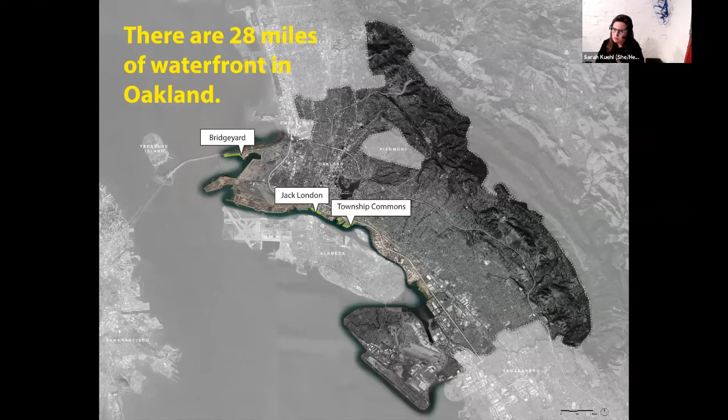When we started the office, I had been working at Peter Walker Partners on some planning for this site at the base of the Bay Bridge. When a new contract came up, I was fortunate to get my name associated with it, and we stayed on the team and got to continue, even though our office was only about 6 months old at the time. This is an extraordinary site in Oakland, especially in terms of its relationship to the bridge and to San Francisco. It was quite a journey where we learned a lot of what we needed to know to do Township Commons, about all the agencies, regulation, and how to bring something to fruition.

And ultimately, we're very pleased that we achieved a consensus among 8 heavy-hitting public agencies to have a park in this location, to reach big and make it bigger, to take the Bridgeyard building, the Ierbys building, back into the public realm, and to link it with trails back into neighborhoods where people are. So that was kind of a heavy lift at the beginning, but something that at a planning level has been very successful.

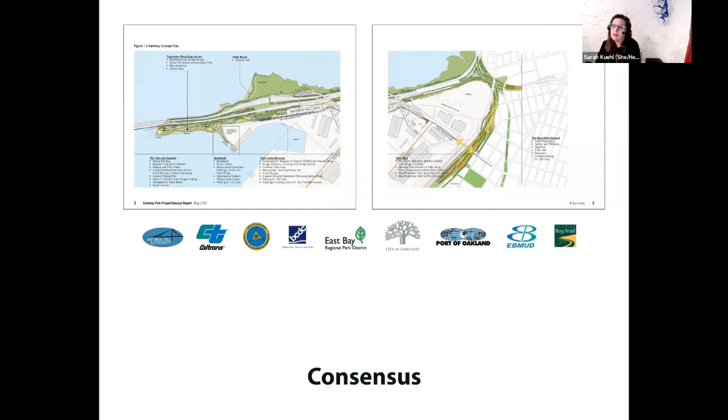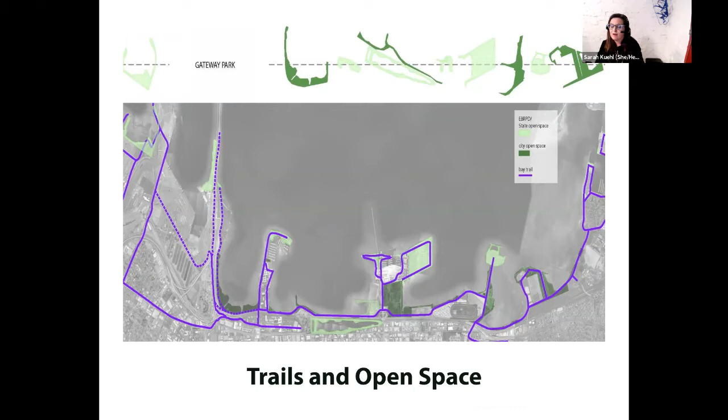It got us thinking a lot about the relationship between trails and open space, and how trails and open space need to work together, and that the best places actually do this very fluidly, where you could move from one space to another, use as many as you want, and move at different speeds through the landscape, whether walking or biking, or as we are now seeing, a lot of roller skating.

One of the things we thought about a lot on this, which has carried through in our work, is what is the three-dimensional experience? One of my pet peeves is that I think a lot of planning is flat and two-dimensional, and the three-dimensional experience of this place was pretty extraordinary. Little changes in height changed what part of the landscape you connected with, or you felt like you could see, or how big the space you were in.

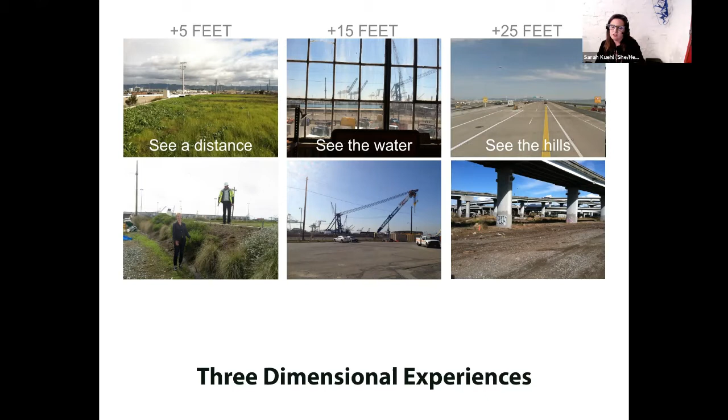And because it's such a narrow space, these little shifts became the way to construct a kind of procession of being in the space. It also shared some things with the Township Commons project, in that the old Ierbys building...

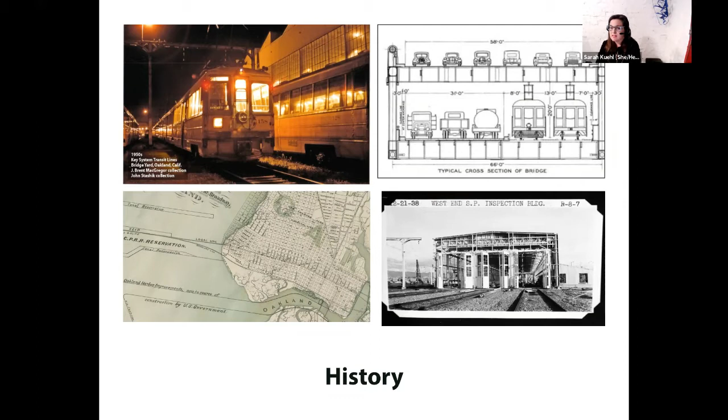...is a significant building that's actually on the historic register, where the key system used to stop and have trains repaired before they went over the Bay Bridge. So it had a lot of things about it that were important to think about, and to think about not just the past, but the future, and how all of those things might come together in something we would do today.

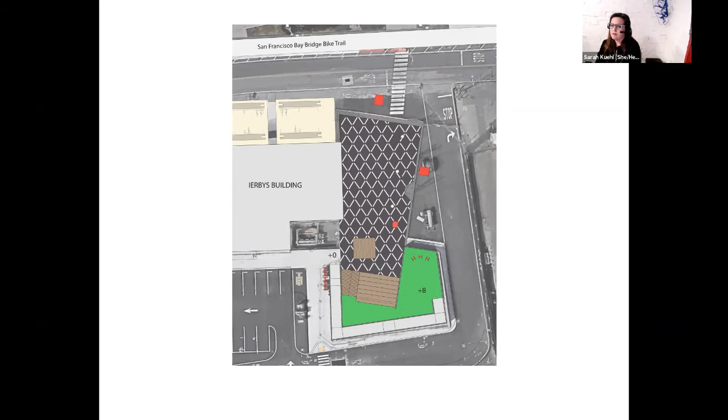We were very fortunate to get to do a kind of proof of concept project for the opening of the Bay Bridge. At the end of the Ierbys building, we did what was to be a temporary plaza at the time, an insertion that was just going to be there briefly, but I'm starting to realize it might be there a very long time, that made space in front of the historic facade of the building, and also gave people a viewing terrace.

And I used to come out here and wave my arms and say, this could be a great park. We're near the water. It's going to be wonderful. But not being able to see that made it very, very hard for people to imagine what it could be.

When we actually made our intervention, I used to joke and say, oh my God, it's our first landscape project and there's not any plants, people are going to wonder what we're up to here. But I feel like it's a great example of a landscape project which talked to this larger landscape of the bay and the waterfront and the water's edge.

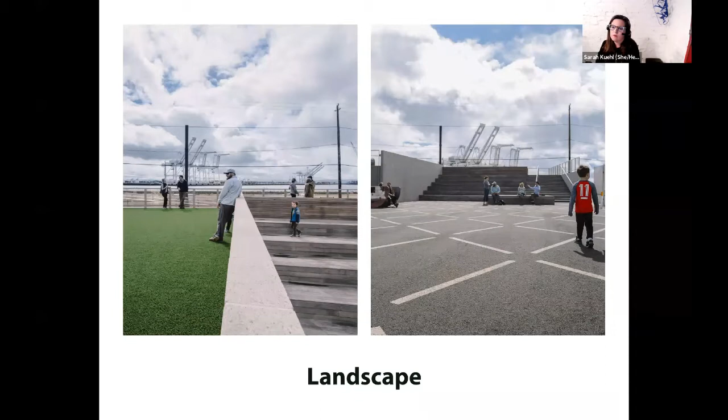So there was a stair, basically a bleacher that was made at one side that lifted you up and gave you views out to the cranes and out to the water, but also created a space with the flatness below that could be used for performance and other things.

And when we were done, there was a party for the opening of the Bay Bridge at the completion of construction. And all of the many people from the California Transportation Commission and MTC and others who had been nice to us about our ideas, but not necessarily on board, climbed up on the terrace and all suddenly went, oh, I see what you're talking about, because they could see the bridge.

This happens, the clouds are blowing it out here, but it's on axis with the tower. And you could see water on both sides of the toll plaza. And suddenly this felt like landscape to people as opposed to an industrial area. It was incredibly successful in terms of convincing people that this park really could happen here and could be a space that people would want to go to.

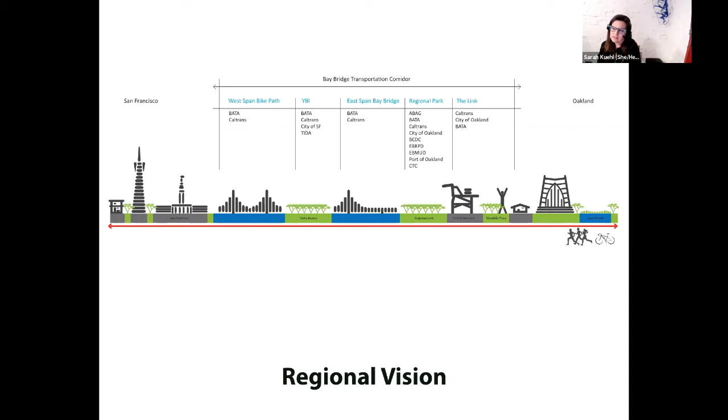The other piece of this that's interesting from an urban design perspective is there's a larger vision about the Bay Bridge and the transportation corridor connecting Oakland all the way to San Francisco, including trying to get a bike path on the west span. This idea of a highway-scale, bridge-scale space combining trails and parks all the way there is still being worked on, and this project is contributing to it, which we're advocating for as part of our work for the connection to Oakland directly.

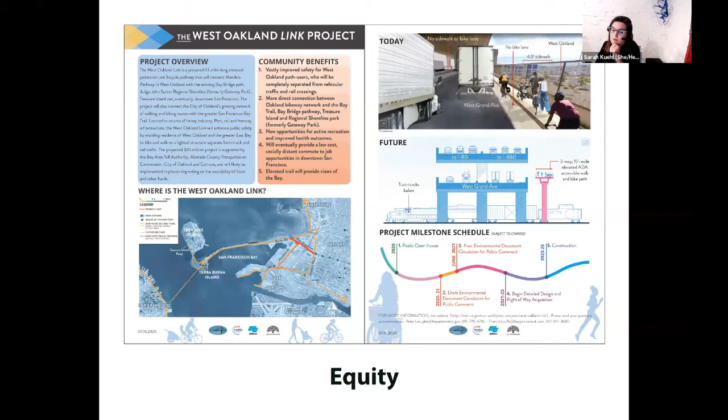Right now there's a bike path that only goes north, toward where IKEA is and up. We're looking for a more direct connection to Oakland to the south, advocating for the equity of that. It feels like only one of the off-ramps from the bike highway was built, and we want it to go both directions, connecting to these open spaces to reinforce what we've observed about open spaces and trails needing to work together and link people from neighborhoods to open spaces, particularly at the water's edge.

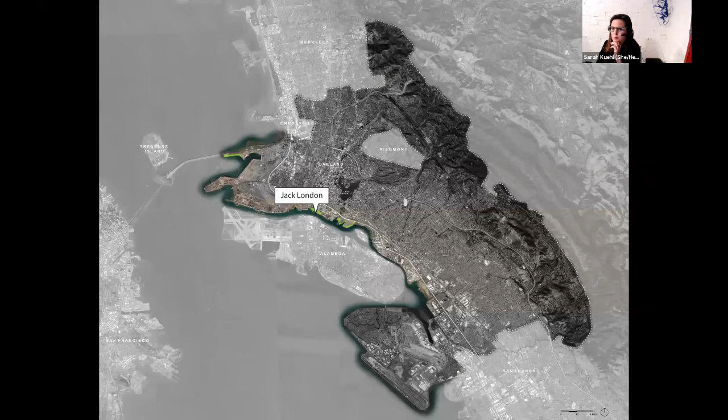The second project I'm going to talk about is at the other end of Grand. We got to work on Jack London, and our work there was very limited—we were brought in to address a bench problem. These are the existing conditions we were brought in to evaluate.

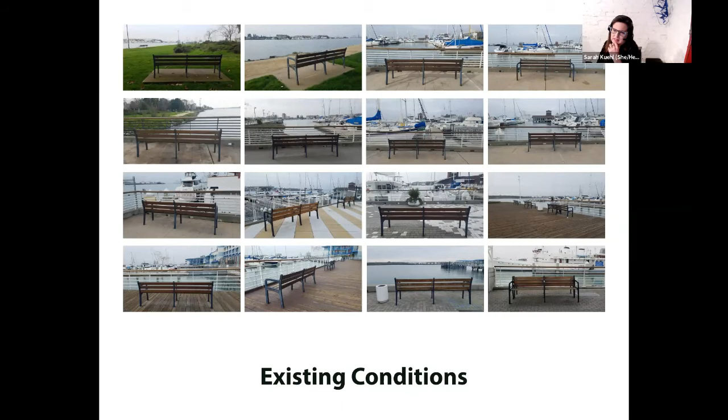It was kind of a stunning thing—it wasn't just that the benches were almost all located the same way, but they were positioned such that if you sat down, you looked through the railing. So we did an analysis of this and said, I think it could be better.

We looked at seating as something that actually has a lot of different social interaction possibilities—different ways to be alone together, or together with people you don't know, or to use things in different ways. And we said, we think we could do a proposal.

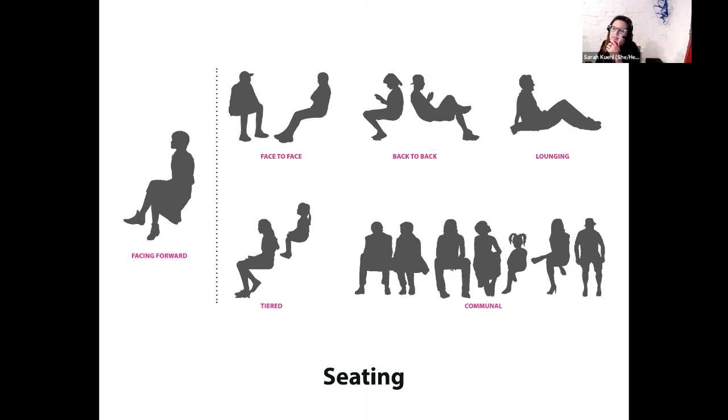We did really funny diagrams about how we'd keep the same number of butt spaces currently on the benches, but reconfigure them. We justified this to the port and BCDC and to the client, and people were on board with making a transformation.

This whole idea was partly because Jack London has been struggling to get up and make it. There have been a number of moments of intervention and things done to try to make it succeed. I think even the name was confusing—it was called Jack London Square. So as part of this, they dropped 'Square' and started calling it Jack London. I kept pitching that this is actually a good public park.

People can come here and do the things they would do at a park, and we should be trying to think about it as much that way as an entertainment retail destination. So we were looking at what was that little in-between scale that could extend what you might do there. And this was mostly with furniture.

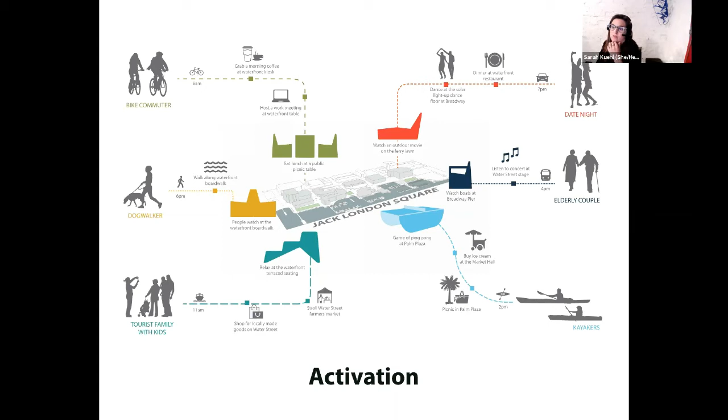A lot of this was done with just attention to clarity around things that you want to look at and things that you don't want to look at, things that you want to fade away and things that you want to use to order.

And we took all of the old concrete pots that were very white against the background and painted all of those with a stripe and tried to make it so you would see the plants.

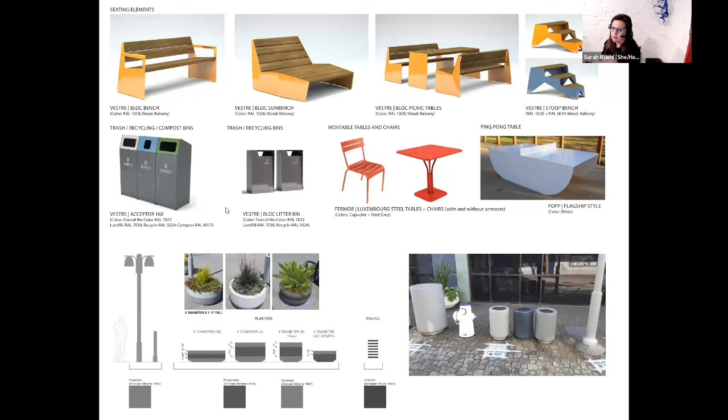So my point in sharing this project is our firm is actually unusual, I think, in some ways, in that we do high-end residential and we do small-scale projects, but we build a lot of our work. And so our thinking about urban design or large-scale things is informed a lot by the things we think about at a smaller scale, like color and palette and getting something lined up.

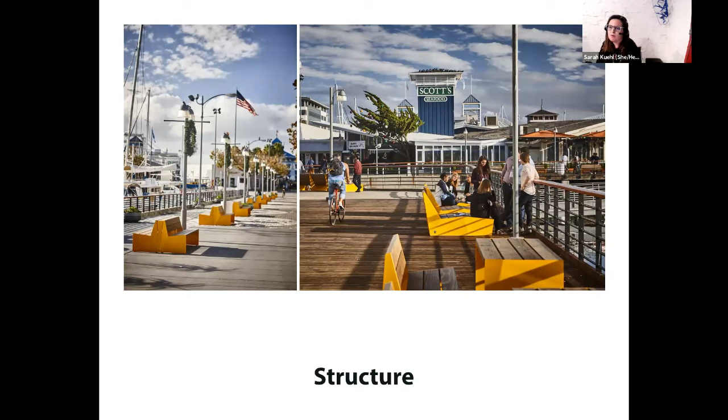So in the end, we ended up with a project that in some ways is very, very simple, but it was a lot about repetition, painting out light posts so you didn't think about them, locating things so that there were places to gather, and really simplifying what was here, trying to make sort of moments within the landscape that spoke to landscape, that somehow had a gesture to them, to a borrowed landscape or other things.

Should I keep going, Brian, or do you want to ask me questions? I'm happy, totally happy either way. I think we can keep on going.

Okay, great. So the real meat of tonight's discussion is about Township Commons, which we feel incredibly grateful to have gotten to work on, partly because we live in Oakland and feel like this is a contribution to the city that we are really proud of, partly because it's kind of always your dream to get to do a project like this big and this public, and you never know if you're going to get to, and partly because it just had a whole lot of happy accidents along the way in terms of opportunities that we were able to find and make real, but there were some really lucky things here too.

The project is located at the mouth of the Lake Merritt channel that connects to the Oakland estuary, and there's about 3,100 units of housing that are going into a 4-phase development. It is a place in the city which has been brownfield sites. It's been used a lot by artists. It's been kind of a no man's land in some ways for a long time. And this development is huge in terms of the transformation of the city at this location.

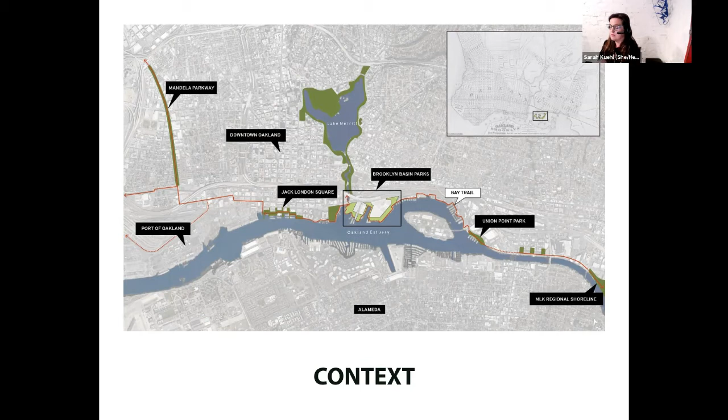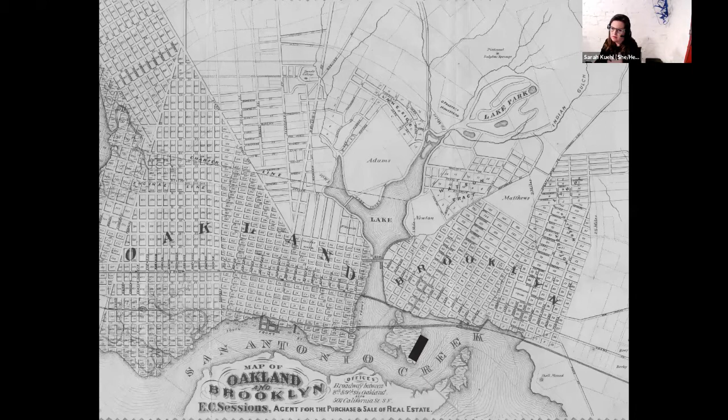This is Brooklyn, named for a boat that actually crashed here coming from Brooklyn, New York. But our site really was in the middle of water and marsh, if you look at the long history and ecology of the area.

It's a place in the city where getting to just sit and look at the water is a real amenity. We really think one of the first steps towards building ecology or stewardship in citizenry is getting to be near places that have ecology, and that you want to be close to things to begin to value them.

This history of the site evolved, and the 9th Avenue terminal was located here. And before container shipping really moved the Port of Oakland to where it is today, this part of the Oakland estuary was really the place to be for shipping and receiving.

Boats came in, trains came in, trucks came in. This is essentially a break bulk terminal where cotton and lumber and other things were unloaded from ships, dispersed from here, or reloaded on ships. So a whole lot of activity happening at those loading docks.

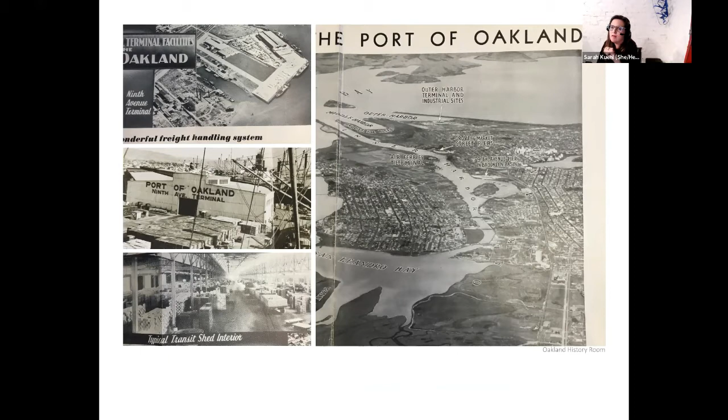The Port of Oakland in that time was a leader in its industry, and the transit shed, which is the 9th Avenue terminal, was full of stuff. There was incredible amounts of weight on it, and a huge amount of activity and labor that happened in this place.

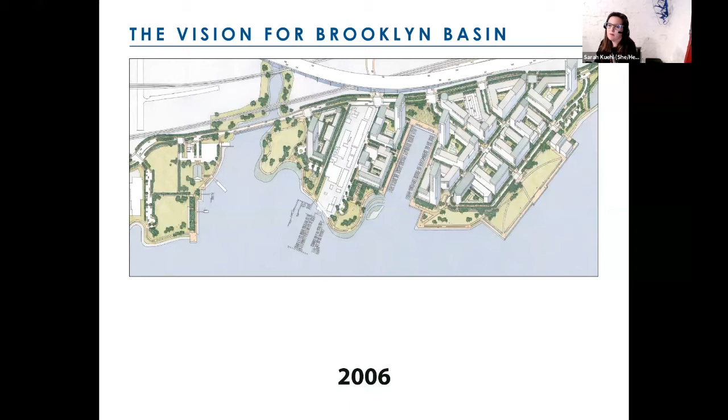When we started on the project, the developer, Signature Development Group, partnered with ZOHP, had been at it a long time. We started this in 2015, but there was actually a master plan that Roma Design Group had done, approved in 2006, which went through almost 10 years of lawsuits after that related to the 9th Avenue terminal. So when we got involved with the project, there had been a very long history that set street width, set building heights. A lot of decisions had been made before we got involved.

One of the reasons we had the opportunity to get involved with this was because the design review committee in Oakland kept saying the proposal doesn't look like Oakland, there's not enough here that's like Oakland. And there had been people protesting that there wasn't enough of the 9th Avenue terminal being preserved, that the story of the history wasn't being told.

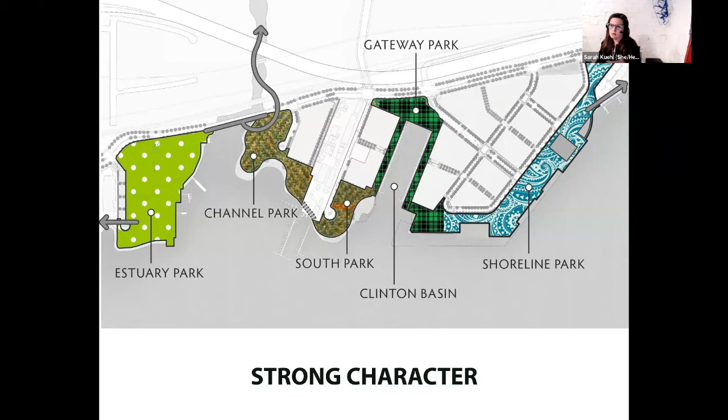So there's a real contrast over the collection of parks at Brooklyn Basin. When we started, this is kind of what the site looked like. It was already starting to have roads and had been cleared, but the 9th Avenue terminal building was intact. We were told to take a look at it and come back and start making some proposals about what this should be.

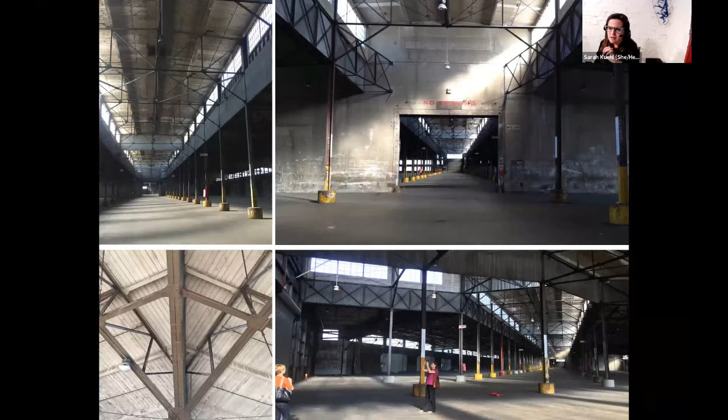I really like old things and old buildings, and it had that kind of magical ruin quality that a lot of places I like do. If you're kind of a romantic about old buildings, it has that. The trusses were made of this tiny little half-inch angle, knitted together. It had a lightness that was very beautiful.

We were particularly taken with the photo on the bottom right, where because of the way a railroad track is laid out, because of the speed at which a train can turn, the whole end of the building actually turned. There was something really beautiful about that moment in the trusses.

We were also really taken by the loading docks and the rhythm of the facade, which we knew at that point had to remain, along with some of the other artifacts we found on the site. We were allowed to say, keep this, keep this, keep this - we like that, we don't like that. And somewhere there's other things in a container, including a phone booth from 1974 that we hope to get used on site someday.

The other thing we thought a lot about, or I was really taken with on the site, was when you walked on the railroad curves, you kept feeling like you were approaching the water, but turning away from it. There was something pretty great about that as an experience of being at the water, curving along that way. That was also a memory of the trains at the site, and we really wanted to keep that in our design.

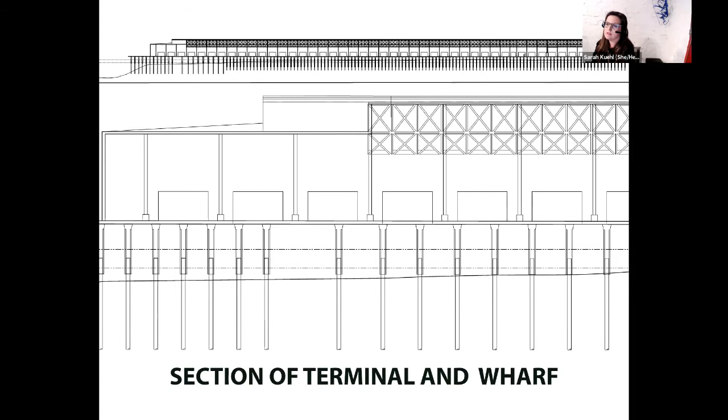Before this, we were thinking a lot about being on structure. Then when we came into this, there's a section showing that the whole 9th Avenue terminal is on piers and on a wharf. So our thinking about what to do at this place needed to be informed by a heavy lift of technical decisions in terms of what you're going to keep and how you're going to do that.

We worked with SGH, and there was also a report by Moffatt and Nichol and other people to determine what the health of the wharf really was. There were some places where it was in real trouble, and other places that were fine. There was an old rock wall under the wharf that, when run through modern seismic code, the rocks would jump around and break things.

So the whole structure that the park is on had to be retrofit to contemporary seismic codes, which was no small feat because the structure had already been compromised in some areas.

Oops, let's see. My screen may have frozen. There it is. There we go.

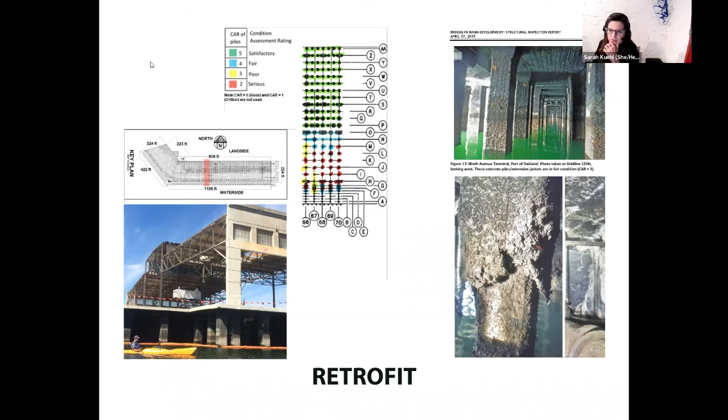Go back one. One thing you can't see now, but I think is important to look at, is the number 9 rebar, an incredible grid of rebar. What it took to retrofit this wharf in order for there to be a park here: there's an 8-inch section of concrete underneath the hill, underneath the deck, all over the surface of this wharf, that had to be saved. We also had to seismically retrofit all of the trusses.

So there's a whole lot of things that happen just to get to zero on this project. I think this is some of the luck on the project, that there was a willingness and a commitment to doing some of this, but a lot of money and resource went into things that you don't actually see in the final design.

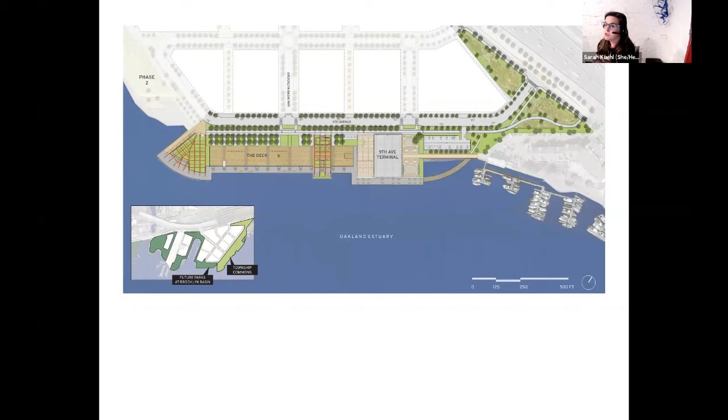And then there's a lot of area near the Embarcadero that has bioswales and kind of an approach landscape and trails into the site.

We really thought about how to do this as kind of an archaeology, wanting to keep the spirit of this building and this place, but also being wary of some parks we've seen where people have saved old things but not worked into them enough to give you an invitation to use them now. So there was a desire to keep old things but really take to heart this idea of adaptive reuse.

And to really work into them in ways with interventions that changed how you might imagine using them, trying to create contemporary conditions that would evoke places to play, gather, and for sports. The one big arching thing for those who have worked on the waterfront, this is within the state lands jurisdiction, and the rules say I can't have a basketball court or a playground or anything that wouldn't be considered a regionally drawing amenity. So part of working in and trying to get the spirit of this place was trying to get something that felt like something without some of the things you would normally do to activate a space.

So we saved 3 pieces of building. We ended up extending the piece that has the facade on it, making a large covered porch at one end. The middle piece we called the garden truss, with quite a bit of planting, a smaller scale, and vines that will eventually grow all over it. Then the hill truss, at the end of the building where that wonderful curve is, has a large grassy hill set inside, partly to give space for performance, but partly to tell you that this is really a park.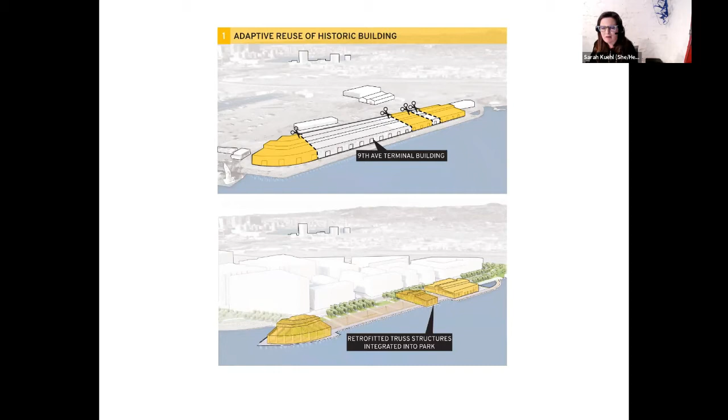We didn't want the public to feel confused or gypped, wondering 'am I supposed to go there?' So we wanted to do something that played with that idea of a park.

The other thing we got really interested in was the loading docks, and was there a way to keep them. So we made the ramps from 9th Avenue into the park at the location of each loading dock, rising you 2 feet up so the elevation of the deck in the middle gives a view over the water. But we kept that geometry, and we worked with an environmental design firm called Volume, who made amazing graphics with those loading dock numbers. I liked the idea that the labor history of this wasn't forgotten or thrown out as we moved into new times.

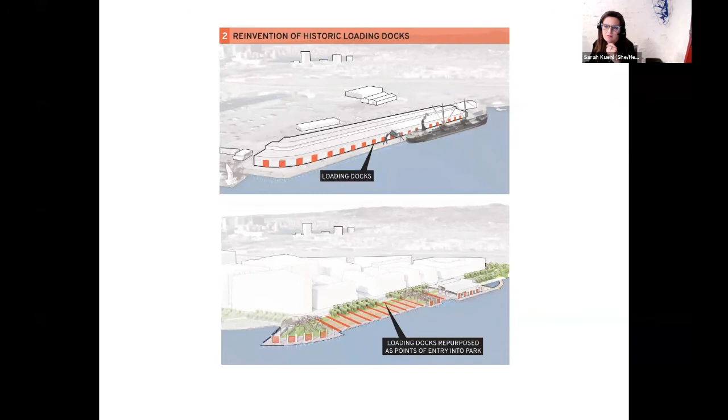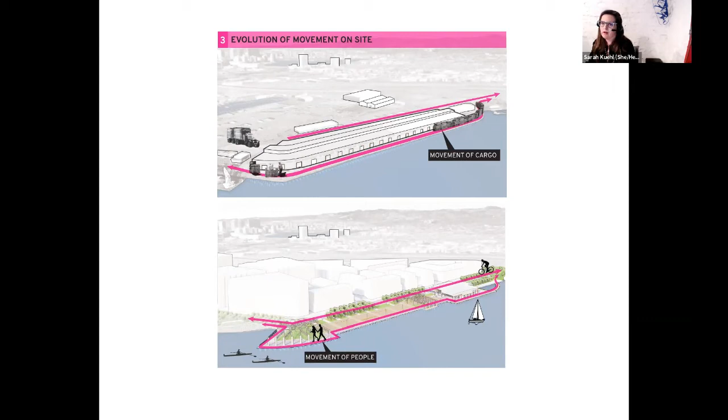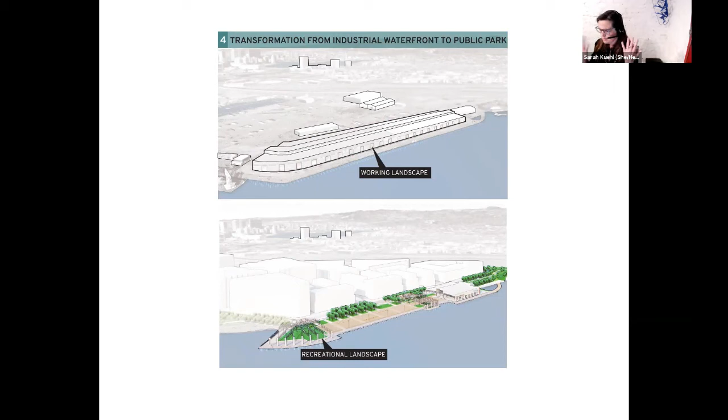The third thing was, as I talked about earlier, the movement of cargo or spaces - we thought about the movement of people and how we could build on that. So we took what was a working landscape and created a recreational landscape that has a lot of the fossily bones of this place, the spirit of it, but which is now a completely different place. A few pictures, and then I'll take questions.

This is the approach as restored. This was work done on this facade by Michael Willis and Associates Office, and the historic paint colors and so forth were put back. This is the approach up to the center of the building.

This is the other end of the park where the hill truss reaches out over the water with this kind of whale-back hill. The deck, the loading dock numbers that you see pulling through the ramps between the planters, the stripe that comes all the way across the deck, and then the numbers down on the water side.

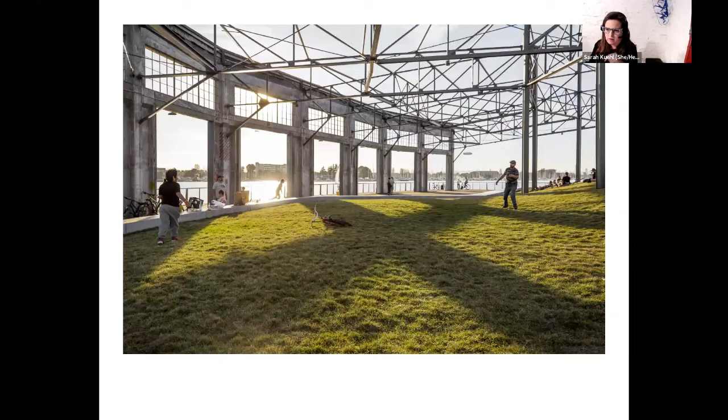Inside of that hill truss, you go up about 8 feet to the height of the hill, and it's a place where you see the water differently and get closer to the truss itself. It's strange in a good way, the shadows are really great out there, and people are finding weird ways to use it, as people do.

From the center of the deck, looking back at the hill truss, you get a sense of the scale and the openness. The deck board pattern is arranged so the light reflects really differently depending upon how the board is laid, so you get a breaking down of that surface, kind of like corduroy brushed different ways, which is really successful in making something of empty space.

The planting on the right side is something we really fought for. It's closer to the ground, so we were able to do that.

We weren't able to have soil really of any significance elsewhere in the park, and we really felt like the planting told you were supposed to be here and gave you some scale. We used the bright yellow furniture partly to remind people of Jack London, so they would know this was public and they were supposed to come, and partly because of its reference to industrial things.

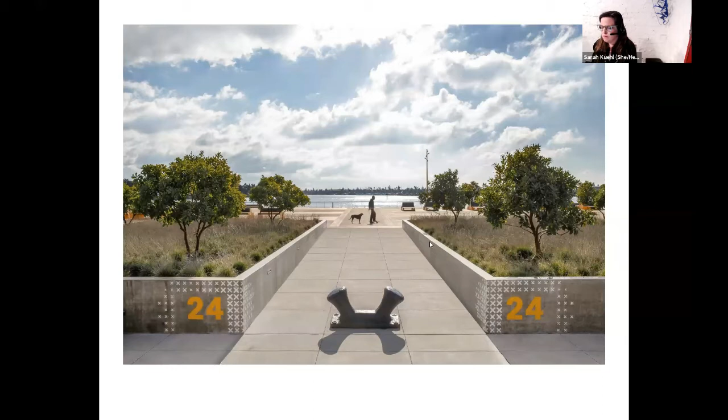This is one of the loading docks with the numbers mounted here, a salvaged boat tie-off that we're using as a bollard, and the approach up to the elevated deck. It's really great that the deck is up 2 feet, but the guardrail is low, so it doesn't feel very tall. You feel much closer to the water, and looking down, the water feels much more present.

Inside of those planters, we've seen a lot of birds and pollinators and other creatures making their way here. There's a young pheasant who thinks this is his home, looking back out at the watery landscape.

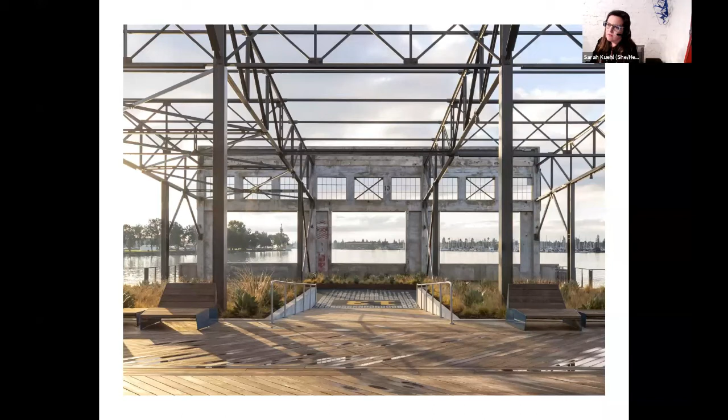In the garden truss, you can get a sense of how we retrofit the trusses. If you look closely, you can see where we've added some steel. We've also added a couple of X frames. We worked really hard to make sure architects in particular would find this respectable. We wanted it to look like we had succeeded in retrofitting it without ruining it, and we feel pretty pleased with how it turned out.

We also fought really hard to keep the marks on the building. There's some old marks and graffiti, and we clear coated them, but they're there. You can see how one of the loading dock numbers in the foreground relates to the old opening there.

This is the walk along the water on the other side of the deck, and the loading dock numbers are designed so that if you took a picture from up in an airplane, they would actually be the same digital pattern as water, evoking the shoreline on one side. You can see this very broad area along this side and a very simple guardrail in connection to the water.

The thing that maybe we're most proud of is when we went to the design review committee, they said, but how will the public know they're allowed to come here? And what will they do here? And will people really want to be here? It has been incredibly well received by all of Oakland.

Lots of different kinds of people come here to do lots of different kinds of things, but we've been particularly pleased to see how it works as recreational space, and recreational space for movement, which is something we thought about: bikes and roller skaters and skateboarders and others in the space. There's a lot of love for it across sort of 3 generational groups.

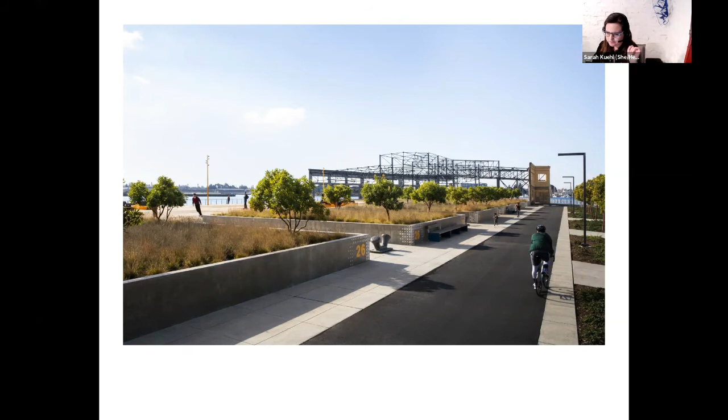So this is the bike path, which will connect to future parks. We only have about 1/3 of a mile of the Bay Trail in this project, but in the end, there's almost 2 miles of Bay Trail in all 4 of the parks. It comes along this side and connects to Jack London, as well as to parks to the south.

From inside the 9th Avenue terminal, when you look back out at the park, you can get a sense of how those 3 pieces of truss stack up, and the quality of the space, which is a lot about holding empty space with very little, but enough that it feels defined and you know where to go.

It's been really interesting to see how people have made this their own. That large ramp, which was obviously needed because we wanted to do universal design, has become one of the favorite places for kids age 2 to 5. It's been very interesting to see how this topography evoked a lot of things and a lot of ways to use it.

Right now, this is phase 1. There are 4 phases of parks, and we'll be working on the second phase. Right now we're in construction documents, which is the piece that goes from 5th Avenue around one side of this Clinton Basin and connects back to Township Commons. We're working on that one now.

We have no idea if we'll work on more after that, but we're really excited to do that one also, because it's on ground and we'll be able to really plant some big things, which is really exciting for us, and just to see this vision come all the way together.

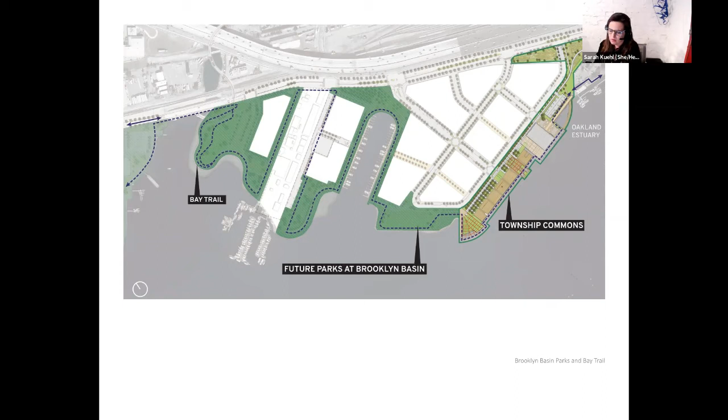My closing comment, since I felt I needed to say something about urban design given this forum, is that it's a really interesting time in Oakland because we have one of the last functioning industrial waterfronts in the East Bay area. That waterfront is super valuable for that reason, and we're always going to have a partially industrial waterfront, but we also have this emerging reconnection to the waterfront with more residential and people using it. So I think we have a very interesting consideration of how to bring those two things together, how to separate them appropriately, and also how to connect our parks back into our neighborhoods and make sure people have a way to get here.

I don't think we'll get a simple diagram of just lining the water's edge with joyful recreational parks. I think it's going to be messier and maybe more interesting than that. And I'm excited to see where it's all going. So thank you.

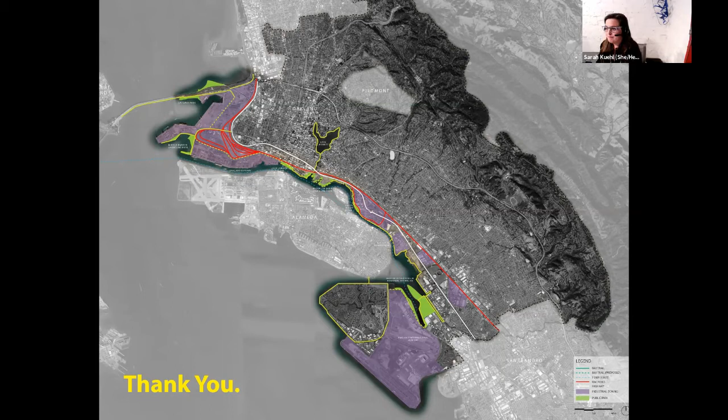Thank you, Sarah, very well done. Appreciate that, you covered a lot of stuff quickly. Yes, impressive.

I'm trying to sort through the questions, and this is a great way to end, because I was thinking that based on the questions, we'd go globally and then go back into the projects. So I think you touched upon it right here at the end.

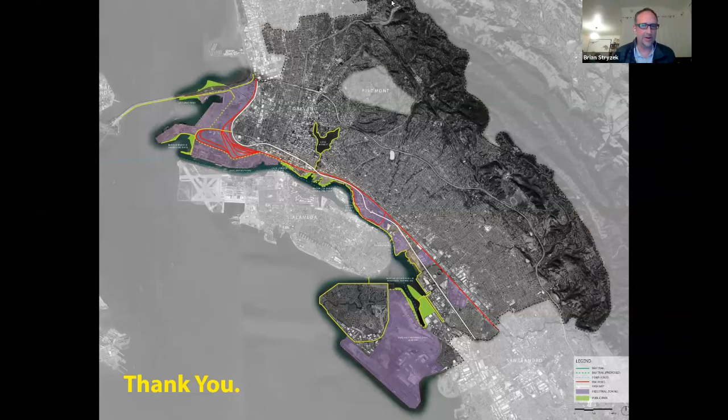There's a question from Louise Ingalls: there's 30 acres of built out parkland along the shoreline, is that right? At Brooklyn Basin, yes. And they're really asking about this idea of connecting back into the neighborhoods, and how is that done? When you're dealing with Brooklyn Basin, what was the conversation around that, particularly regarding Fruitvale and how that works? I know right now you have the railroads there, BART going through underground, Highway 880, all that stuff.

Yeah, I'm just going to pull up a different plan, and I can't do it while it's sharing, so give me a second. It's a great question and a really important one. There are so few places where you can cross the freeway, and so our emphasis was a lot about Fifth Avenue and how to make Fifth Avenue a place where you felt really good about crossing the street, crossing the freeway, because you can cross under there.

This became incredibly important, and actually the developer decided to pay for bicycle lane improvements all the way back to 8th, partly to make that happen. Also thinking about how you arrive here as a bike and pedestrian, there's a bus stop here, there's a future parking garage. This new piece coming, I think, is going to be a really big deal. I also think the bridge that was added here is a really big deal in terms of access, maybe from Oak Street and from the BART station. And so there is a weird site because it's cut off.

I think partly why we're so encouraged by the people coming is that—and we may have gotten very lucky with COVID—people are desperate for spaces. People have made this a destination for biking, but we're finding that people are finding it, and social media helps. If someone is on Instagram saying there's this great new park, people have a desire to go find it. So there's physical geographies, but there's this other geography, and they seem to be working on our behalf.

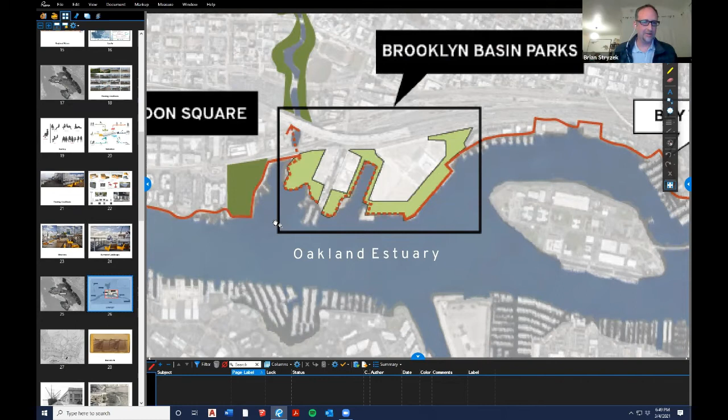In a similar way, thinking about it more horizontally, the connection of the Bay Trail—you started off by thinking about Gateway Park and how that started connecting to more of the region. Does Brooklyn Basin do the same? Where do we stand with the Bay Trail and its connections through all these projects, particularly in Brooklyn Basin and further south?

Yes, well, this map, if you look really close, has dashed lines and solid lines for the Bay Trail. So we're in the process of building our part of it. There's some complexity in the ownership, where there's a piece of land that is not owned by Brooklyn Basin, so right now the Bay Trail has to go back to Embarcadero.

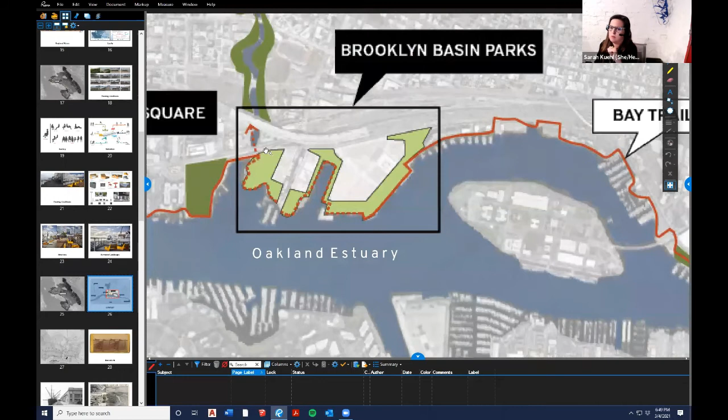But in general, the vision really is that the Bay Trail makes our waterfront democratic and accessible. It's the continuity and totality of it that makes it available for all of us. There's a commitment to having it be strong through all of Brooklyn Basin.

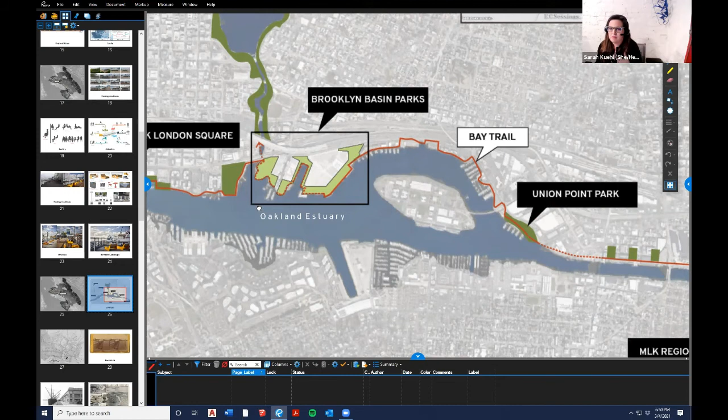I think it's going to be a big deal because our office is really close to Jack London. When we started, we walked from Union Point Park all the way up and looked at all of the waterfront to see what was working and what wasn't. It's tough, not a very great walking experience, but the parts that are going in now are better, and extending it and making it better, I think ultimately it all gets improved.

I really want to see Broadway improved, and the bike connections from downtown Oakland. There's a bike bridge proposed to cross from the Lake Merritt trails over the freeway and over the railroad or under the freeway, something like that. But it wiggles over here and lands right at the park. I think all that connectivity will eventually make it work better. The more is more, as you build more trail.

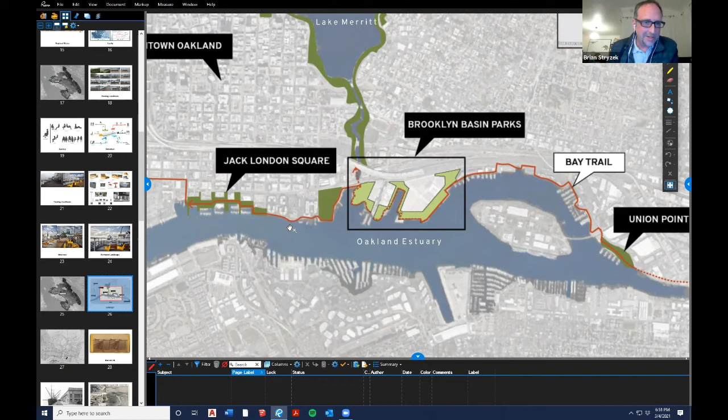Nate had a question about the Howard Terminal, which I think is good too, because there's not that many pieces of developable land right now along the waterfront, and that's a big hunk that there might be a ballpark on at some point. The EIR just got approved, so it's getting closer. Are you guys going to do that project too? No. I think there's a New York firm involved in that.

I have thoughts about that as an Oaklander and as a business owner in the neighborhood. I think it's really interesting. That project is right at this tension we were talking about, industrial uses and recreational uses. I'm interested to see how they take it on, and if that could be something really interesting. Kids are interested in heavy equipment. It could be great, but I think it has to be embraced.

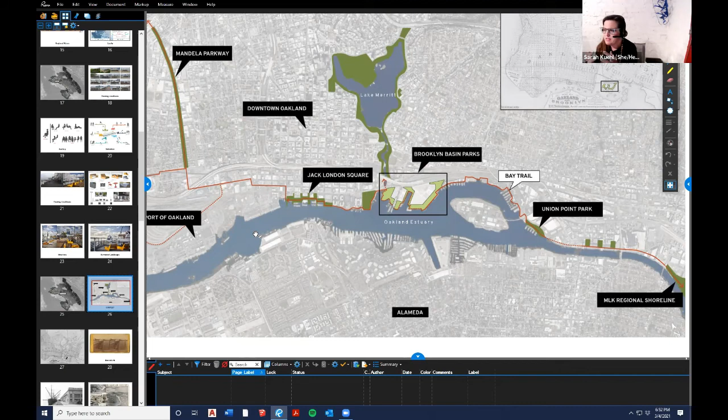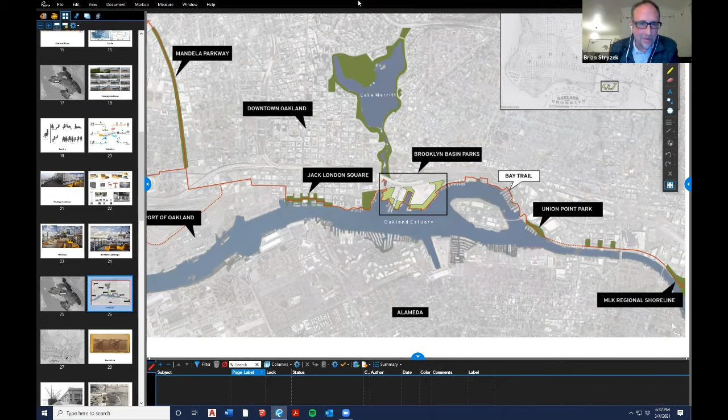Yeah, that's true. I don't know, is there any questions that people have that they want to speak verbally about? I have some other ones, but they're more microcosmic.

You threw this out there in the middle of your Jack London focus, but I was wondering if you'd elaborate. You mentioned that you build a lot of your designs, can you talk about that a little bit? Yes, and I should be super clear, I don't mean I build or Liz builds, because there are people who do that and that is really hard work. I mean that we don't just draw a vision, we really do construction documents and go through field and see projects all the way to the end, and sometimes even into activation phases. I think it changes how we think about planning.

We've been talking about the idea of full circle thinking. My example, which is a little unfair, is that every urban design plan has perfectly arranged alleys of trees on both sides. But if you've ever had to lay out a sidewalk with vaults and utilities and all the things you really have to deal with, you know how hard that actually is. Thinking about design from the perspective of a respect for what it takes to build things changes your respect for built things, which is maybe good. There's a great Jeanne Gang video recently about carbon and saving carbon by saving old buildings. I think there's something to be said for respecting the work that has gone into things.

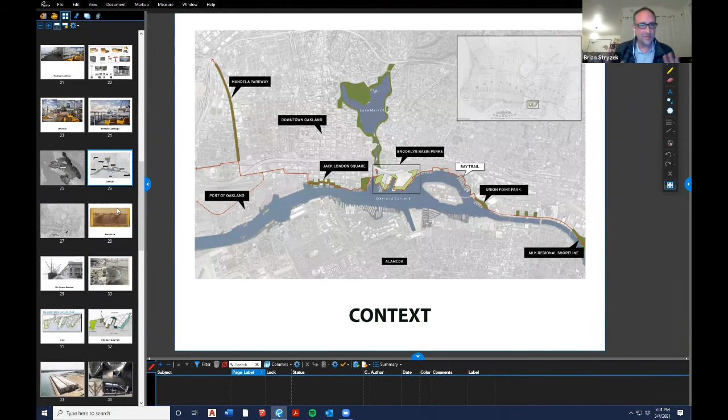So going deeper on the historic building, you have this vision of going out there and looking at the trusses and the beautiful light coming through it, and then finding pieces to preserve. So your role, or EK's role overall on designing it—sounds like Michael Willis is involved in some historic aspects. Were you the architect of the structure, or does it sound like there's more coming with the kayak shop and other things? This is a great question, and actually somebody pointed out to me that people might think we didn't do the architecting, but we did.

So the building was cut into 3 pieces. The 2 trusses, the one with the hill in it and the middle one, were 100% Einwiller Kuehl with the support of SGH as a structural engineer. The 9th Avenue terminal piece was kept more intact and has conditioned space—Michael Willis's office did the interior shell and facades of that, and worked on the retrofit.

We also had conversations, so this piece is less ours. And then other architects have been involved—I think Flynn Architecture and others have worked on the interiors and tenant improvements inside the building. So there's a couple of hands in it, but in fact, even though it's odd for a landscape architect, we did do the design and structural coordination and all the drawings for 2 of the 3 trusses.

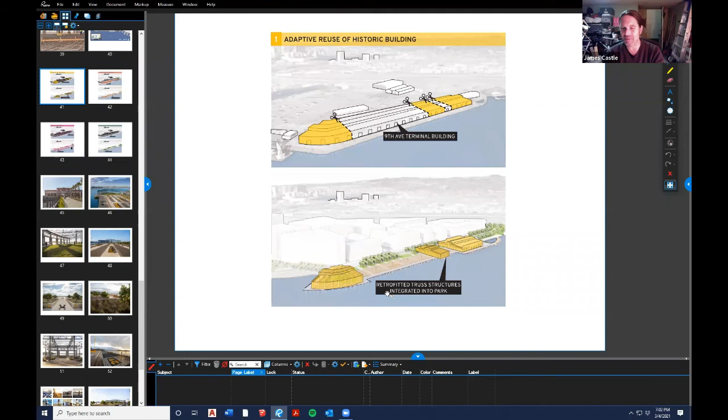What was that like? That had to be a pretty good learning curve, right? Yes, sort of. I think the bad-good thing maybe about my personality and Liz's personality is we like to do things we've never done before, probably more than we like other things. We're generalists, but we believe in solving problems—we know about structures and working on them. So it was fun in one way and hard in another. If anything, our big worry was we wanted our architect friends to think we did a good job, so we'd have some street credibility. So we were motivated.

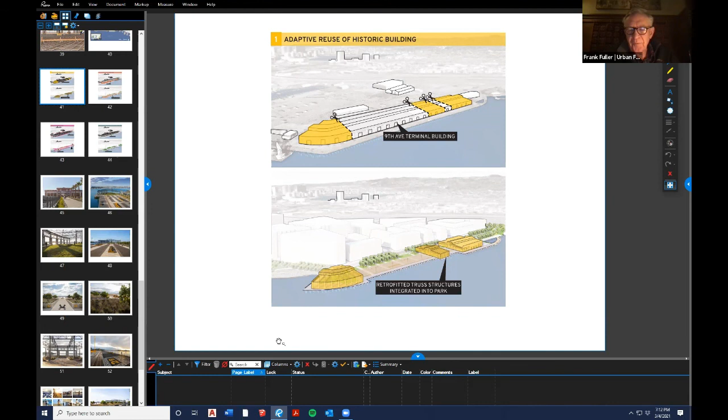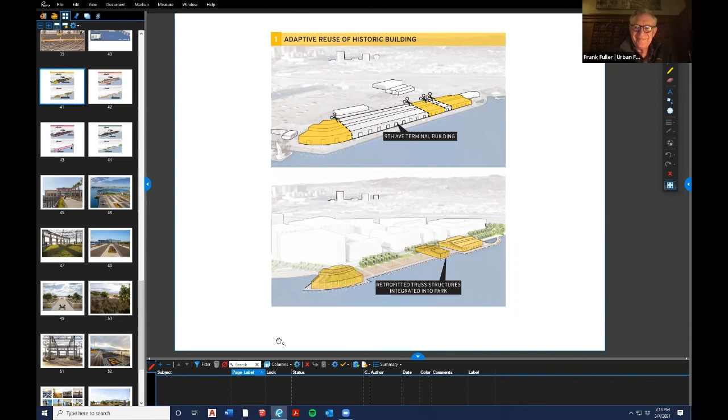Okay, super, thank you so much. So I had a couple questions. It's interesting hearing about the water taxi. I was asking, what are your thoughts about connections between Oakland and Alameda across the estuary? And then secondly, when you were talking about your non-local projects, how do those influence your work, or how does your work in Oakland influence your work elsewhere?

Very different questions. I'm a big believer that if we could have more connection to Alameda, it would sure be good for Alameda for one thing. They have real traffic issues, but also I think using your water makes you value it. There's a lot of talk in landscape architecture about ecology and sustainability, and I think it needs to be rooted in human experience, and just being on the water where you might see a bird, I think is a huge part of that. And I would like there to be more ways to connect here.

So there's some stuff that's planned. There's an idea about a bridge. There's a bunch of other things. But I think in general, low tech and things that can really happen are great. So I don't know if that answers your question, but that's sort of how I think about it. And then in terms of our work elsewhere...

We're definitely true believers in site-specific design. There's things about every place that are super particular and the designs have to relate to them. I think we're equally true believers in things like proportion and things that are beautiful, so it's kind of a mashup of both. When we work outside of the Bay Area, the hardest part is establishing relationships with contractors or having enough time to make the connections that make something really good. So we spend a lot of time investing in that, making sure we can really get things done, not just have ideas.

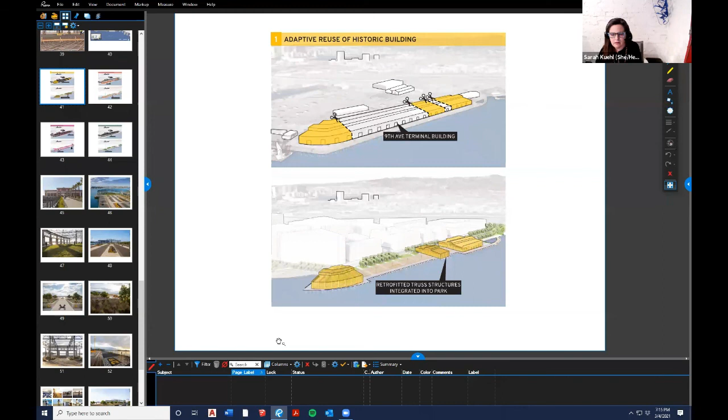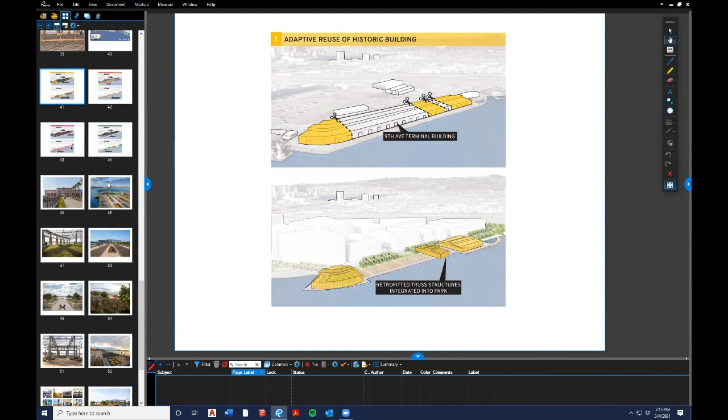Maybe a follow-up question. Earlier in the presentation you talked about a concern with Brooklyn Basin reflecting Oakland in how the design came together. What are your thoughts, from having gone through it, about what makes Oakland Oakland, or how this project is particular to Oakland?

Sure, that's a great question and a complicated one. So when it was described as not being Oakland, it had bull-nose granite seats and axial fleur-de-lis things that were really foreign here in some ways. It just didn't—it felt like it came from another place. So I think the desire was to do something that talked to the industrial history of the site.

It's very specific and talking to the 9th Avenue terminal. In this location, there was work done—a master plan for the waterfront by Walter Hood and somebody else—and it really talked about the industrial history. So it was kind of defined for us what Oakland meant in this location.

I think what I like about it is it's a lot of different things, and it means different things to different people. But I think there are some shared values around populist values—something for everyone rather than the most elite, fancy thing we can do. And I think there are shared values around equity held by a lot of people in Oakland.